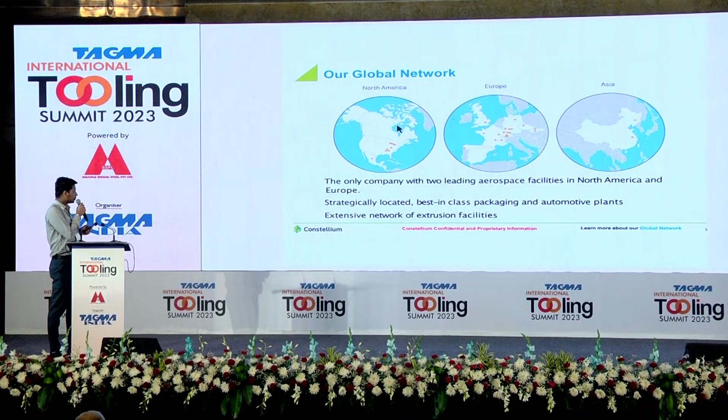Their core markets are aerospace, specialties, automotive, and packaging. They have a very vast global network and are the only company with two leading aerospace facilities, in North America and Europe, along with strategically located best-in-class manufacturing for packaging and automotive applications.

For automotive, they make car body enclosures, body-in-white, crash management systems, battery enclosures, chassis and mechanical parts, decorative parts and equipment, heat exchangers, and structural components. For aerospace, they supply wings, fuselage, engine components including gearbox and landing gear.

Constellium also has a huge share in the packaging industry, with beverage and food cans, foil stock, closures, aerosols, and cosmetics.

The customer list speaks for itself - Mercedes, Ford, BMW. In aerospace, in 2022, NASA's Orion SLS rocket traveled beyond the moon and back utilizing Constellium's Airware aluminum-lithium alloy solutions. For the Ford F-150 Lightning, Constellium provides structural components, and they work closely with beverage can makers and tool manufacturers to design high recycled content alloys for can lids.

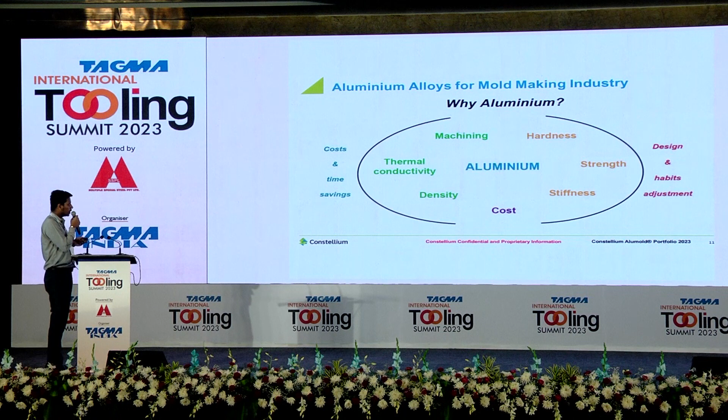For thermal conductivity, it's 3 to 6 times higher than regular pre-hardened steel, and density is 1/3 of tool steel. Of course, there's an optimal hardness, strength, and stiffness. If we can modify our design and habit adjustments, the outcome is huge in terms of cost and time savings. Let's look into the individual points.

Regarding mold manufacturing, aluminum has 3 to 5 times higher machining speed compared to tool steel. Since it is conductive, both electrically and thermally, the EDM speed can be increased up to 5 times compared to tool steel.

Polishing time is 1/4 of tool steel, deeper milling conditions are possible, and reduced adjustment time is achieved since it's a lighter alloy.

Whenever the tool room manager thinks about the manufacturing cost of a tool mold, the major factor is milling cutter or milling tool life. We can increase milling cutter or milling insert life by a minimum of 3 times when manufacturing aluminum molds. This is a typical comparison machining index showing where aluminum alloys stand.

Coming to the thermal conductivity part, we can reduce the cycle time. Believe me, we can reduce the cycle time by 30 to 50% compared to tool steel currently in use.

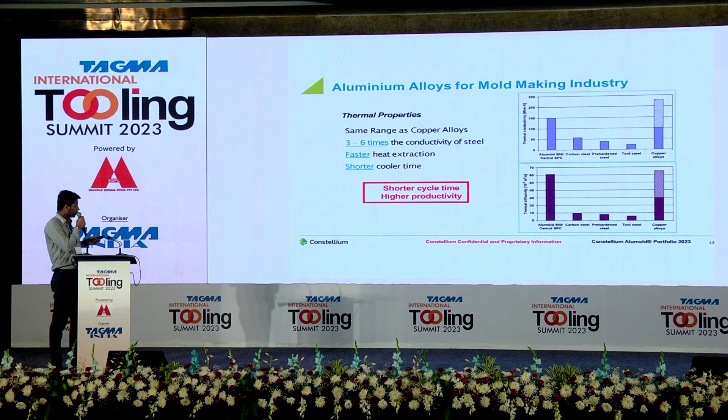And the thermal conductivity is very similar to the copper alloys. You can see on the right-hand side and left, the first and last bar is of copper alloys, and where the aluminum stands. So shorter cooling time. What is shorter cooling time? We were able to manufacture 100 components in an hour. With aluminum alloys, we can manufacture minimum 130 to 150 parts per hour. So we are saving a huge time on the injection molding machine. Time is money.

This is a typical example of thermal application. This is a valve housing in PE with a wall thickness of 30 mm. You can see the cycle time on the left-hand side with the aluminum series is 5 minutes, and this is a 30 mm wall thickness in aluminum alloy. With 20 mm wall thickness in steel, it has taken 15 minutes. It's more than 50%. And the ovalization is reduced from 2 mm to 0.4 mm. This is a cavity pressure of 1,300 bars and the maximum pressure of 1,600 bars.

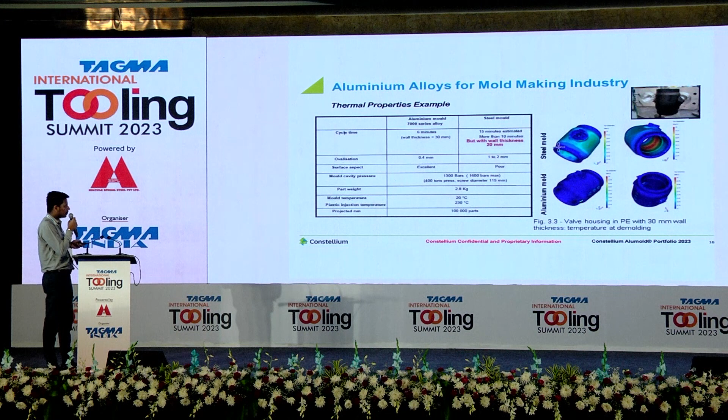Also, I forgot to mention the temperature distribution during demolding. You can see the part temperature distribution. This is of a tool steel mold where we have cold spots as well as hot spots. When it comes to an aluminum mold, the temperature distribution is more or less uniform.

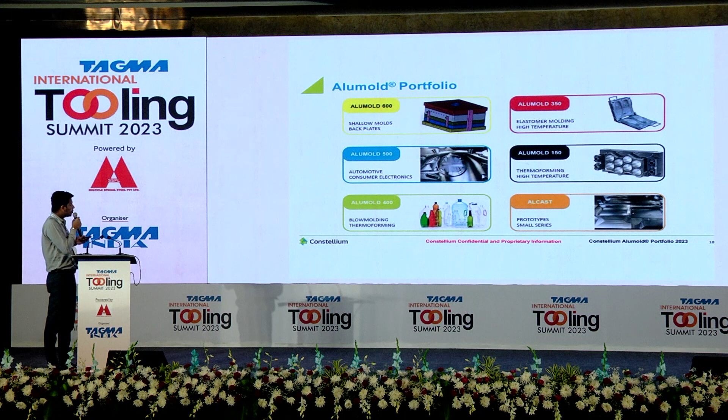Yeah, let us look into the Alu Mold portfolio, what we have. I will start from Alcast. This is particularly for prototypes. We have Alu Mold 150 for thermoforming and high temperature applications. We have Alu Mold 350 for elastomer molding, high temperature applications. Alu Mold 400, especially for blow molding and thermoforming. Alu Mold 500, automotive and consumer electronics. Alu Mold 600 is especially for backplates.

This is the typical mechanical properties comparison. Alu Mold 500 is very strategically placed so that it will meet all the demanding applications of injection molding. This is the dimensional availability of our Alu Mold series. Alu Mold 500 is available up to a thickness of 700 mm, limiting the other alloys up to 300 depending upon their applications.

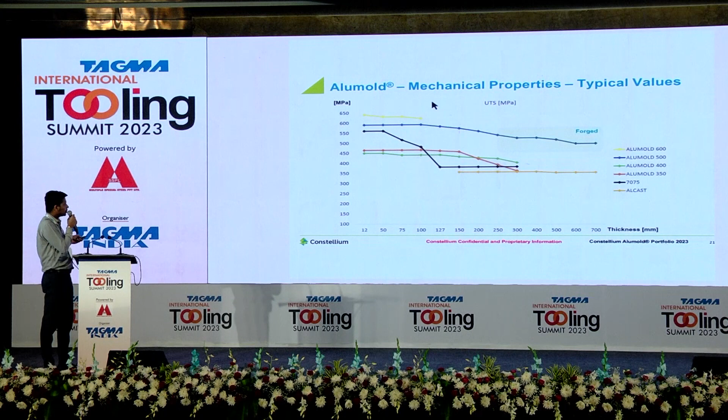Yeah. As I told, Ms. Susan Tan has specifically spoken to me regarding the 7 series alloy. Alu Mold 500 is developed from 7075 itself. But the major disadvantage of 7075 is that when we go to deeper machining conditions, when we increase the thickness and do more pocketing, the mechanical properties reduce drastically. The black line indicates traditional 7075, whereas the blue line indicates Alu Mold 500, where the mechanical properties don't change much with increasing thickness. So throughout, the material property homogeneity is fantastic.

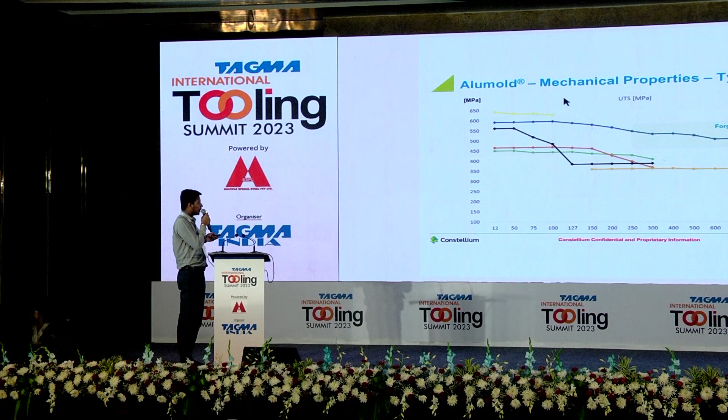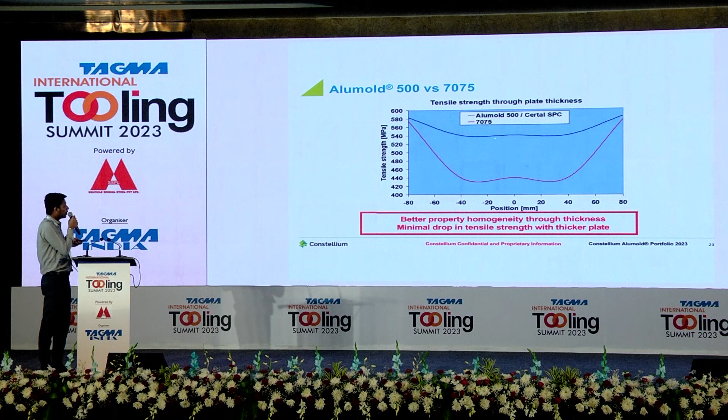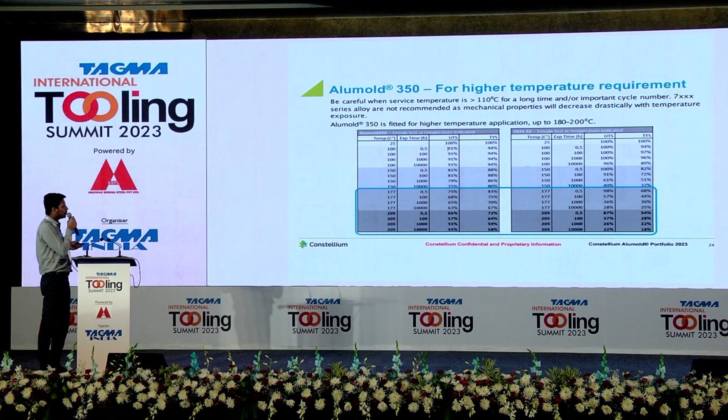Alumold 350 we put forward for high temperature applications, especially for rubber molding, where we can go up to a temperature of 180 to 200 degrees Celsius for the molds. Yeah, this is the portfolio for injection molding as well as rubber molds.

This is a typical selection of the Alumold series based on the polymer and the number of shots you need. It starts from less than 5,000 parts to more than 5 lakh shots. Gentlemen, we are not talking about prototypes. It's regular production injection molding molds, right? For PP, PE, PET, and ABS, we can go more than 5 lakh shots with a combination of Alumold 500 plus steel. For PC, PA, and POM, we can have Alumold 500 with surface treatment plus steel to go above 5 lakh shots.

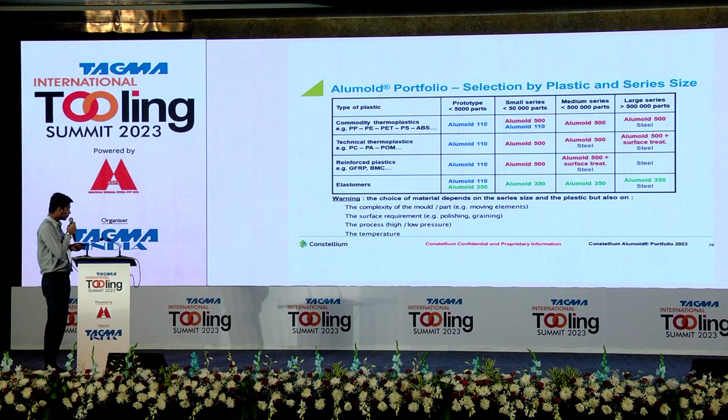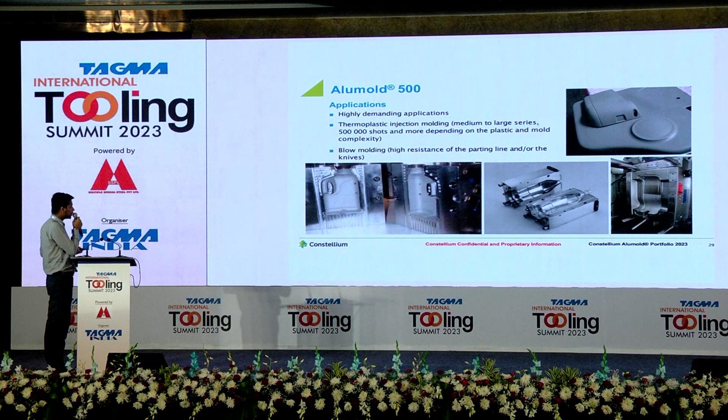These are the typical applications of Alumold 1 500, especially for thermoforming. Alumold 350 for rubber molding, high temperature applications. Alumold 500 for the most demanding applications, injection molding. On the right-hand side, you can see a door pocket of Renault made in Alumold 1 500 with steel inserts.

And whenever we talk about aluminium, what are the applications or case studies the Indian OEMs need? So let's look into a few applications. Motorcycle footboard, PP plus 10% glass fill. Engine cover, 50,000 parts with PA6 plus 30% glass fill. Lighting base, 50,000 parts, PP plus 30% glass fill.

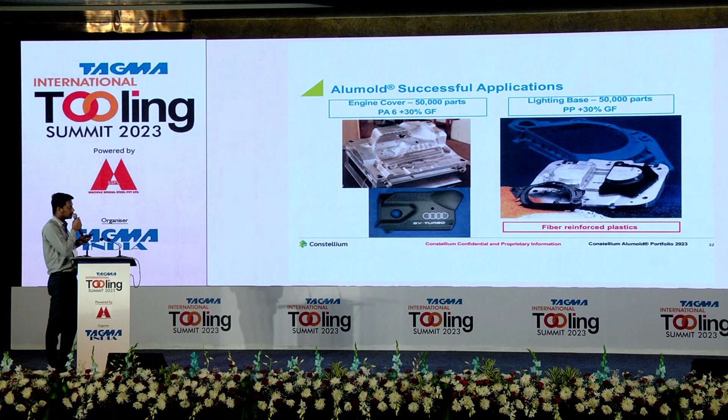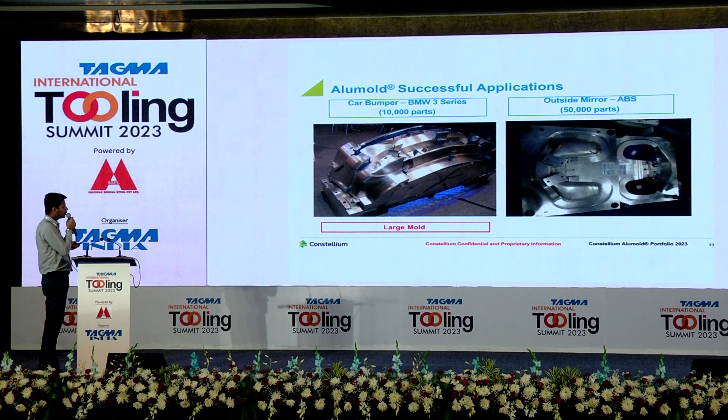BMW 3 Series car bumper, 10,000 parts. Outside mirror in ABS, 50,000 parts. Microwave steamer in PP, 3 lakhs parts. Refrigerator tray, that's also in PP, 5 lakhs parts.

Regarding polishing, the polishing procedure takes 1/4 of the time in aluminum compared to steel. So whatever mirror finish we can achieve in tool steel can be replicated in aluminum as well.

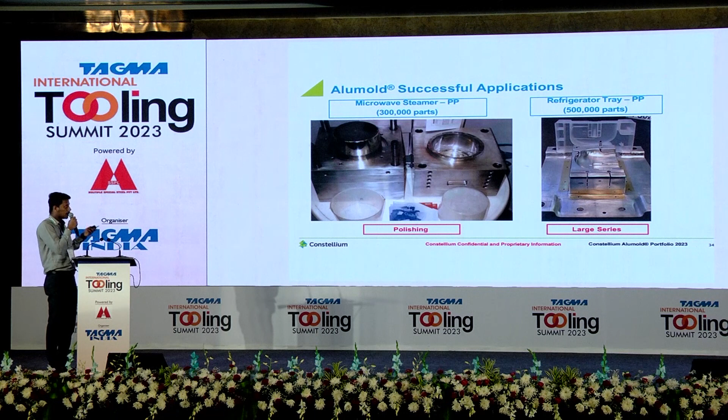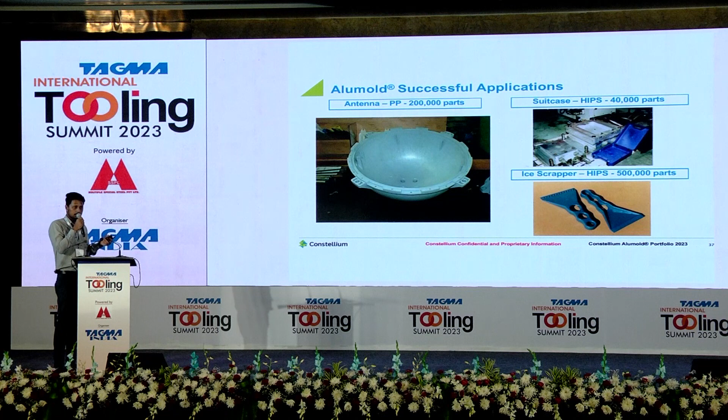So the last part, the simulation. We have been using a lot of simulation software. The Constellium database is equipped with all the major simulation software, especially Moldex3D, Moldflow, and SigmaSoft. The conclusion.

Yesterday, many of our dignitaries were discussing the capabilities of Indian tool rooms and competing with European tool rooms. In my discussion with the business development director, she told me, Sriraj, India is behind around 15 to 20 years in the application of aluminum in injection molding. So my request is, if Europe can take advantage of aluminum in injection molding, why can't India?

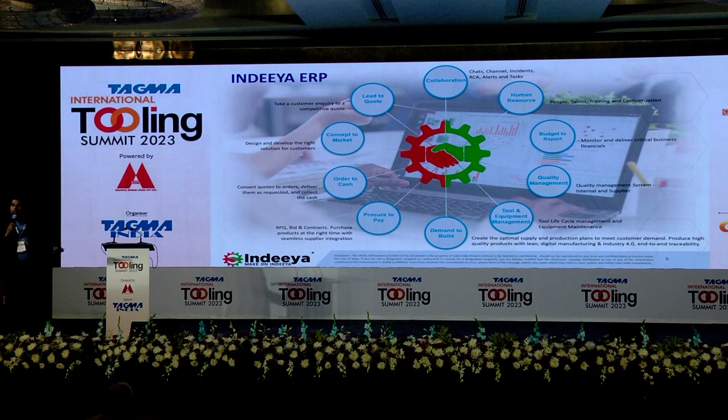Lead to quote, it's inquiry management. RFQs are received from the customers, OEMs, and then you can do the quotation in the platform. And the collaboration is an important thing. This is something like Microsoft Teams, wherein internally all your activities are going to be tracked through these chat channels, incidents, RCAs, alerts, tasks. So everything is documented. That is what the new world wants. So you have everything here.

Okay, so this is what we are committing, globally acclaimed practices and systems. That's what we are bringing to India. Standardizing the process, digitalizing the end-to-end supply chain, 100% traceability on your product, materials, process, live KPIs, you get to know the real-time information on your shop floor. Ecosystem, I already discussed, collaboration with the entire supply chain. So top to bottom, everyone is connected.

Then we are not going to run away after giving you this solution. We are going to handhold you through the process until the operations excellence is achieved by every company on this platform. So as I said, this is an ecosystem, and this is what we are committing to ourselves as KPIs. We want to improve utilization by 20%. That's what we will ensure for every company who are coming on board. We will increase the productivity by 20%.

We will reduce the quality complaints by 25%. Delivery, we will increase by 10%. Lead time, we will reduce by 30%. Revenue, we will definitely increase by 15%. Cost reduction, 10% reduction. Traceability, 100%, and project management, 100%.

So what next? Cost. Don't worry about the cost, because cost is not the criteria here, because we started this as a philanthropy. We want to put our hands together and elevate the Indian manufacturing community to the next level. So whoever wants to attempt, let's discuss. We are progressing with a couple of OEMs to make the platform their accepted platform for managing all the suppliers. And we are also having discussions with the Tamil Nadu Industry Ministry, where they are committing that they can subsidize when the company implements this platform.